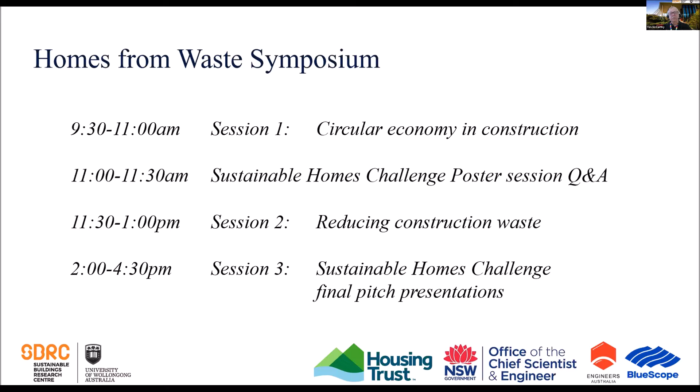We have a fantastic lineup of speakers, and I'll introduce them just before they speak. We've got Monica Richter, project director of MECLA, the Materials and Embodied Carbon Leaders Alliance; Ken McBryde, an architecture designer; Professor Usha Iyer-Raniga from RMIT; Jonas Bengtsson from Edge Environment; and Valentina Petrone from Circular Economy in the Waste Management and Resources Recovery team at WSP, one of our largest consultancy companies.

The order of events - in this online world, people are in demand by others across the globe, so we've had to reschedule things a little bit. Our first speaker today is going to be Ken McBryde.

Ken is a designer and director of Gensler, based in the Sydney studio. He's a thought leader in the construction and mixed-use industry, regularly called upon to speak at conferences, join design award juries, and contribute to research projects. His extensive local and international experience covers design of highly innovative public and cultural spaces, hospitality, retail, commercial, residential, and infrastructure - this guy does everything. In 2013, Ken founded one of my favorite organizations.

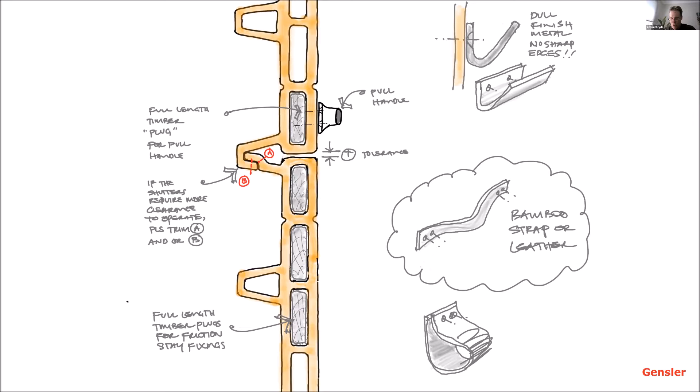Walking up the beach between surfing and working, because we'd been in an all-day, very intense working session with air conditioning and no open windows, we took a break and went to the beach. Coming up the beach, in that moment, I realized what we needed to do was come up with an extrusion that could be not only a roof, wall, louvers, but also floors, because the cost of making plastic products, a lot of it is in the extrusions themselves. So less extrusions and more cost-effective production.

So this is what we came up with about a week later after that working session, and we were very happy with that. It has generous overhangs, full height louvers. It feels like it would belong in the kampung, in the villages of Indonesia, where I'd spent a fair bit of time on surfing trips.

And it did indeed attract positive responses from the governor of Bali and Indonesian housing officials. We were onto it, there was a demand. They wanted 20,000 homes a year, Nev, and we were super excited.

However, we started to discover the fundamental problem of plastic and the specific challenges around recycling plastic waste. Have you guys ever attempted to get all the oil out of an oil bottle, or all the detergent out of a detergent bottle? You can hang and drip and they'll still be lined with residue. We started to discover that the problem with this is that it can't be recycled when it's dirty.

So to meet the structural requirements, we needed quite a lot of virgin plastic, which was not what we were setting out to do. And then we got smacked across the chops when, in March 2015, Cyclone Pam was a catastrophe that forced us to change our thinking.

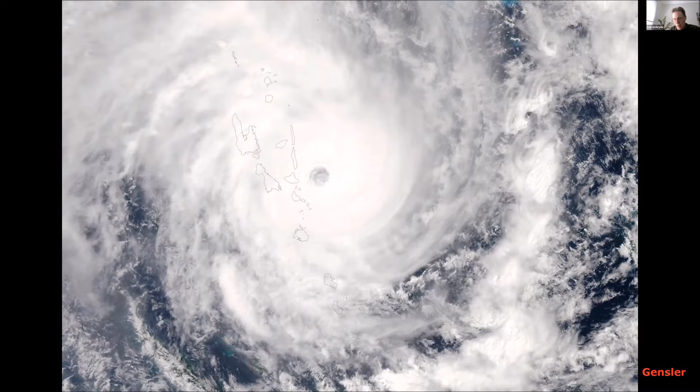And then, at another moment between work and play, I realised the answer had been looking at me. When I was a student, I came back from Europe and studied 5 years in research and development into engineered timber. Timber is the ultimate recycled material. Trees recycle carbon just to grow.

So these are some snapshots from my work, including being taught how to design with termite-resistant timber by Clem Orchard there.

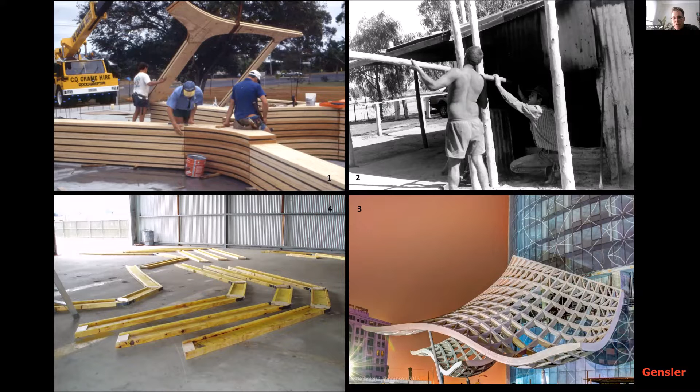And so we were very interested in a combination of timber and plastic in order to solve the problem in Vanuatu. So this is where we got to sort of Nev House version 2, and we supplied 14 nakamal.

They're essentially community buildings to the villages in an extremely remote part of Vanuatu, Tanna Island.

The design's fully modular, it's flat packed, and took about 5 days for a team of trained Australian builders and local teams of volunteers on the ground to assemble these projects. So we use recycled wood plastic composite and timber LVL, laminated veneer lumber, that is, timber portal frame structures.

Some of them were used for schools and some for a range of different purposes. This is a view inside. You can see the full height louvers, center pivot.

They're suffering from long-term deflection and some water penetration, so we've got some lessons to learn there. But essentially, they were very much designed for tropical climates.

You can see we have the end grain protected above the footings. There's a whole discussion we could have around durability in the tropics, but one of the most important things is to protect the timber. We couldn't actually use rainwater off these buildings because there's volcanic ash landing on the roof the whole time, and it also limits the success of the solar panels, which is why we have a little bit of wind there to help top up batteries.

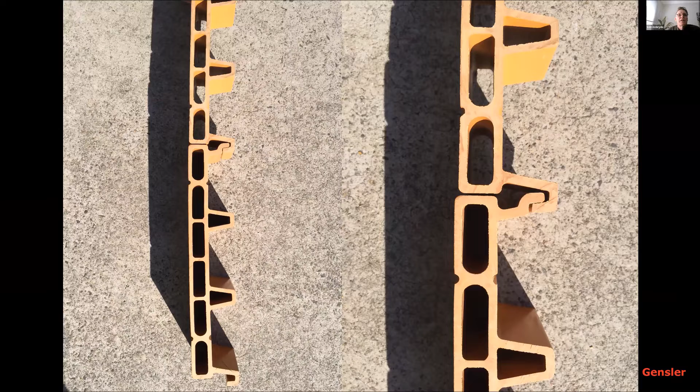The buildings were also used for nurses' quarters, and I think you saw that clinic as well. This is the extrusion that became from that original concept back in the workshop.

But as I mentioned, we're using wood plastic composite, which is a combination of mushed up timber and only 2 codes of plastic. So we were still a long way from solving the use of plastic waste.

In particular, the issue is where plastic waste is collected by communities, they only collect the ones that are readily recycled, which are the same ones we're using. The chip packets and the stuff like that are not valuable, so they don't get collected by individuals who try to get their money back from doing that work in the street.

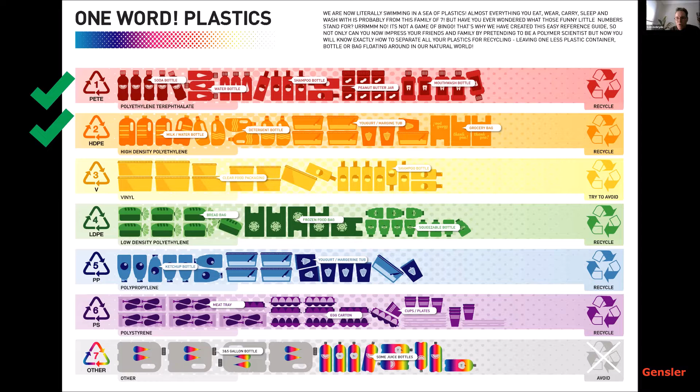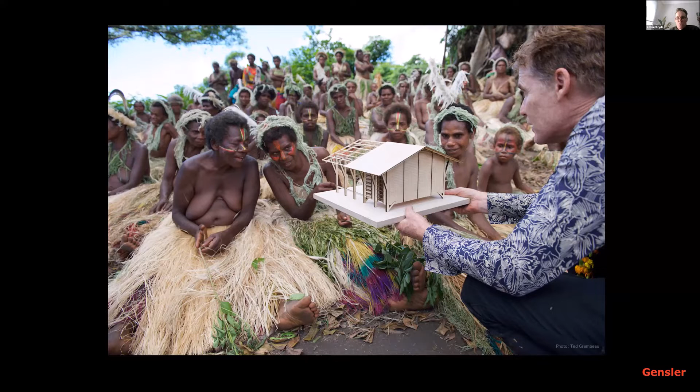The next stage was to be housing, and this is the way we were presenting. This is one of the chiefs. They could understand what we were talking about.

You can see it's inspired by a half house concept by Elemental, the architecture practice run by Alejandro Aravena — oh, his name has escaped me at the moment. The practice is called Elemental. When you don't have enough money to build a whole house, which half do you build? If you only have half the budget, our answer was the cyclonic half.

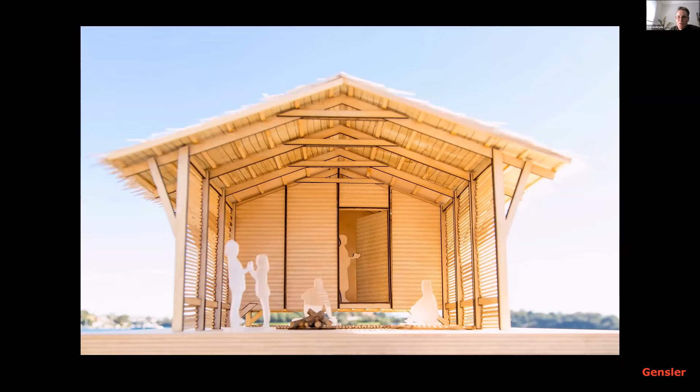So this is the next stage we're looking at, the half house, representing a cyclonic core and then an indoor-outdoor area that can be filled in by locals with woven materials.

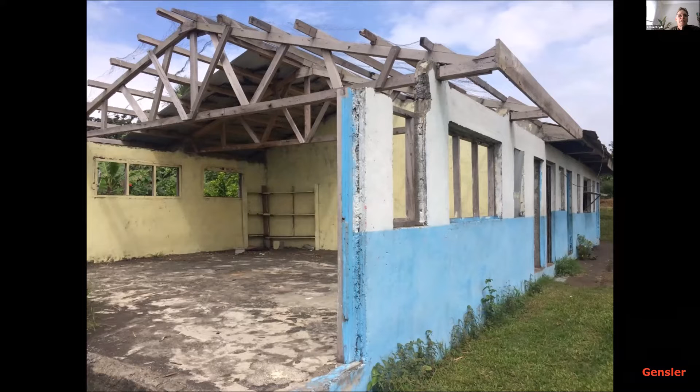When a cyclone wallops places like this, loosely assembled Western materials become very dangerous projectiles. Traditionally, people hung out around banyan trees in an area called a nakamal, and they would huddle in the nooks and crannies of these trees.

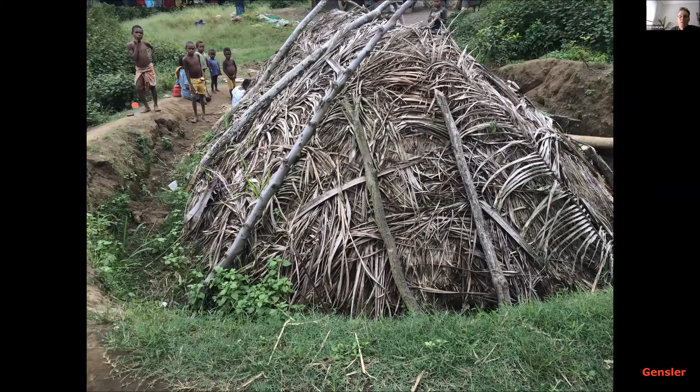This is a traditional construction, and this skill has been forgotten when it comes to housing. We can see how the earth deflects the wind over, the house is buried deep into the ground, and you can see very clear load paths here. This young guy is explaining to me how his grandfather built, and they're all taking a lot of notice now.

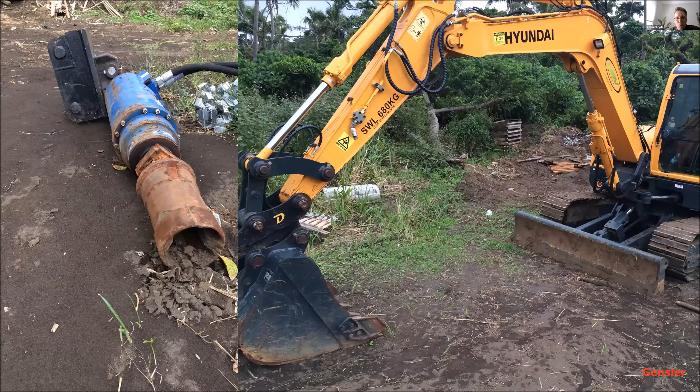But some of the issues we are dealing with: the footings don't look nice with the structure, the steel tubes, the misalignment, because we needed very heavy equipment to screw pile these in. The more suitable equipment would be something like this, or this handheld equipment.

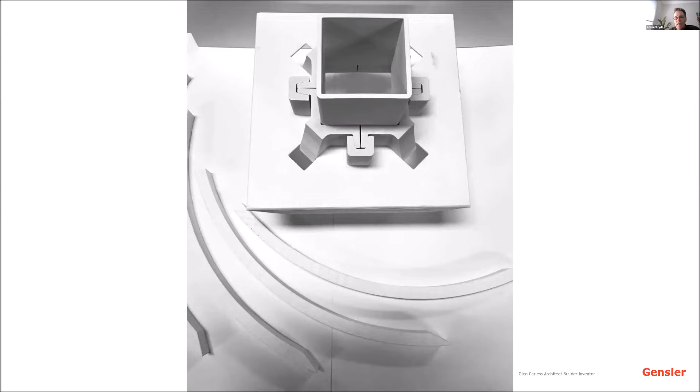I've been working in parallel with an inventor called Glen Carless to try and solve these problems. I'll whip through quickly some ideas about footings that connect more beautifully to the structure itself and that will serve more suitably for the durability challenges we have in the tropics.

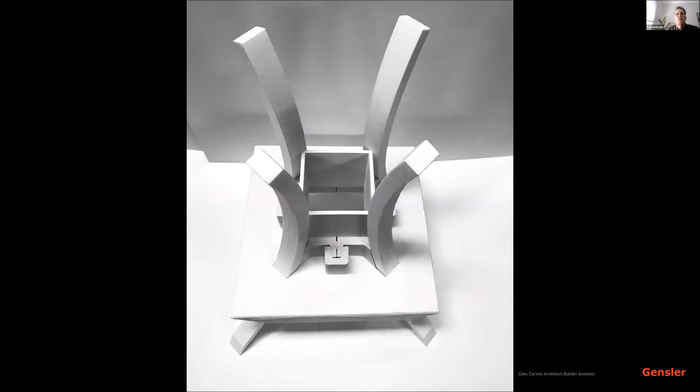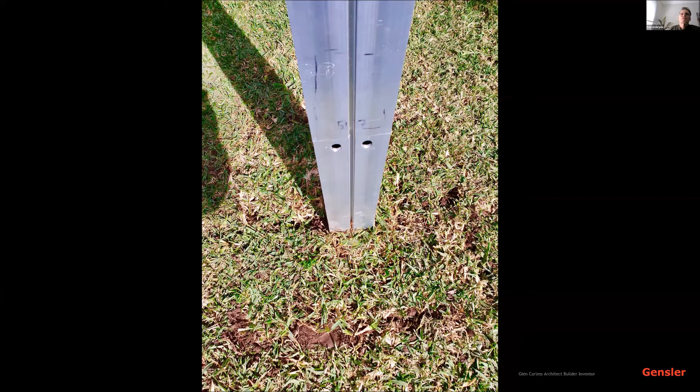The timber, when exposed and not well maintained, doesn't last well, especially if it's pine. This is recycled aluminium, which I'll talk about soon. It's rapidly prototyped with 3D printing and tested in the backyard. The footing itself is the same profile as the column, post and beam.

I'm sure you should squirm when you hear me talk about aluminium, because virgin aluminium is nasty stuff when it comes to environmental impact and embodied carbon. However, recycled aluminium is a fraction of that, and there's an abundance of it still in circulation, and it doesn't lose its structural properties when recycled.

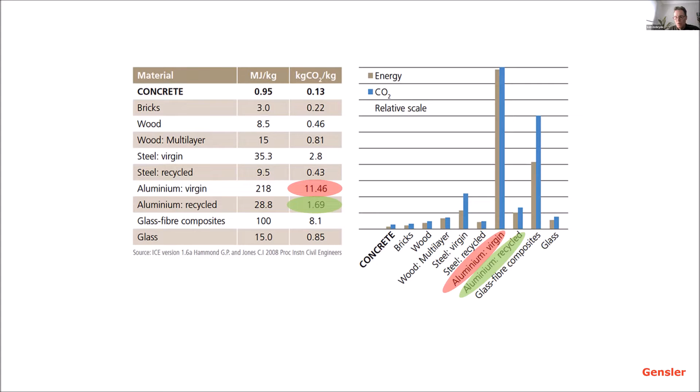So this is where we're thinking we need to augment our flat pack housing for Nev House. Concrete, of course, is to be avoided, so our footings don't have that. But check this out, look at the stair.

When you're putting housing in remote areas, we sometimes don't get any information about the sites. The chiefs choose the locations, as they should, for these buildings. And so the stair kit that turns up doesn't meet the ground.

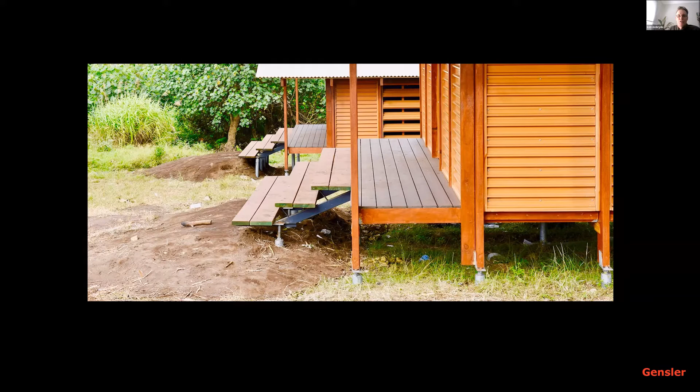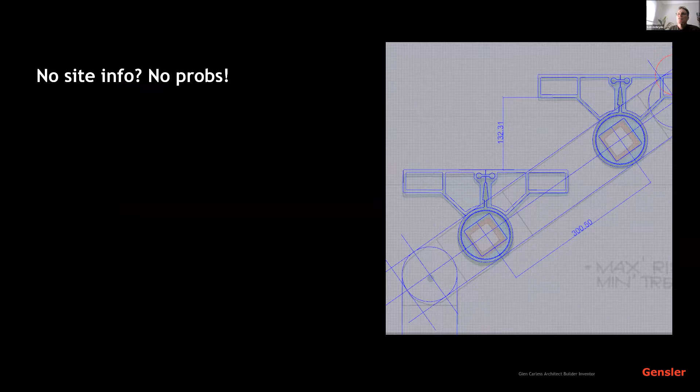So Glenn and I have been working on that problem. Imagine if you could have a kit, a stair that could change its length and indeed change its inclination so that you can solve that problem, and that you could also use the same components to make a ramp.

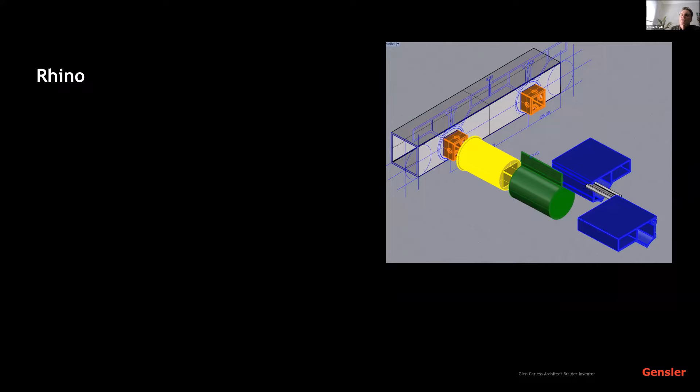So I'm getting very excited working with this inventor, Glen Carless. This is the Revit, the Rhino model he works in, 3D printing, and the real deal. This is also getting back to basics with the post and beam system of the same elements, recycled

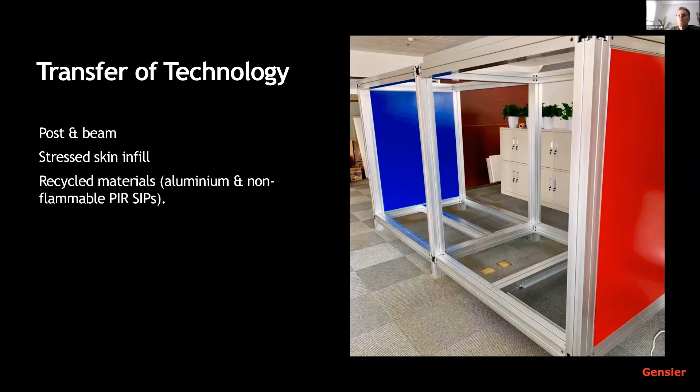aluminium, and we'll be infilling it with recycled plastic waste. It's a kit of parts that takes away all screws and fixings, so we don't need trade skills on site. That's already saving about a third of cost when you think about the cost of construction.

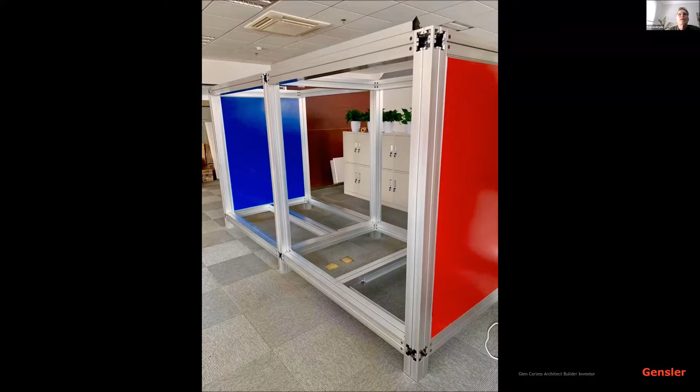This is a prototype assembled by office workers. That was interesting, they didn't have any tools, they didn't need any, and they'd never understood what this was. The kit was given to them and they put it together in their office.

The plastic that I mentioned, we're only using two codes. We're developing expertise out of Texas, where we can get any plastic, dental floss, aluminium, any waste. It gets mushed up and powder compression molded

into this sort of approximate shape of our panels that we designed, so this is molded, not extruded, and the grey stuff in there is just junk, rubbish, no structural properties. And this is where we're headed now.

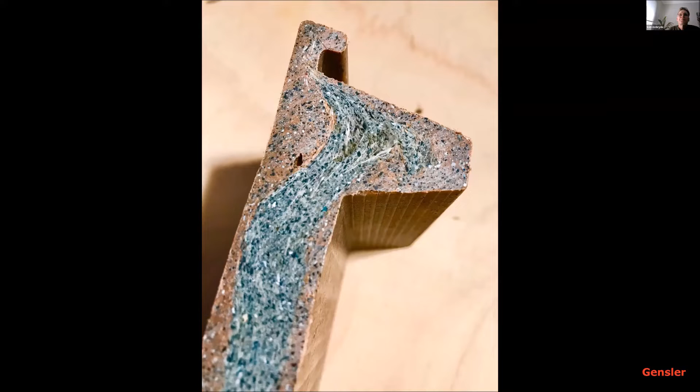I'm pretty excited about this. Meanwhile, we've won a truckload of awards with this work, Good Design Awards and Pitch at the Palace, which is the ultimate international award for startups. So it looks good on paper, but we are still a long, long way to go.

For us to develop low-cost housing for remote communities out of recycled plastic waste, I'd say realistically we're probably two-thirds of the way there, and we've been going for eight years. Thank you very much, happy to chat.

Oh, thank you very much, Ken. That is pretty inspiring. So I'll ask Leila if we've got any questions in the Q&A, and if not, I'm going to start off with one. I thought it was an amazing statistic that you began with about the mass of plastic being produced being greater than the mass of people. And there was a report this week that the mass of manufactured products is actually greater than the mass of all living things on the planet. Yeah, so I think reusing materials is obviously the way to go.

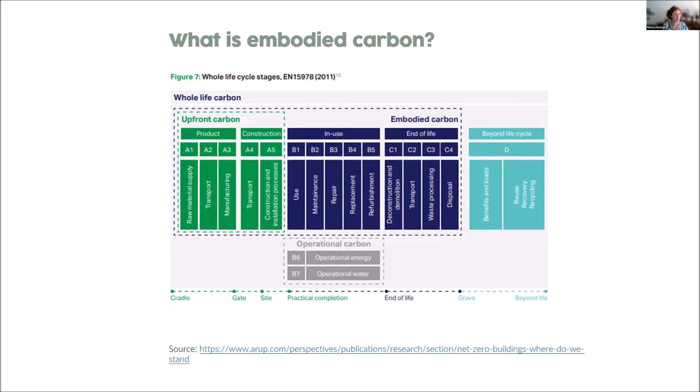What we also know about embodied carbon, from a report done recently for the Green Building Council, is that if we don't address embodied carbon, it will end up being 85% of the whole entire greenhouse emissions for the building and construction industry in 2050, which is pretty significant. We need to be addressing this issue, particularly as the energy emissions reduce.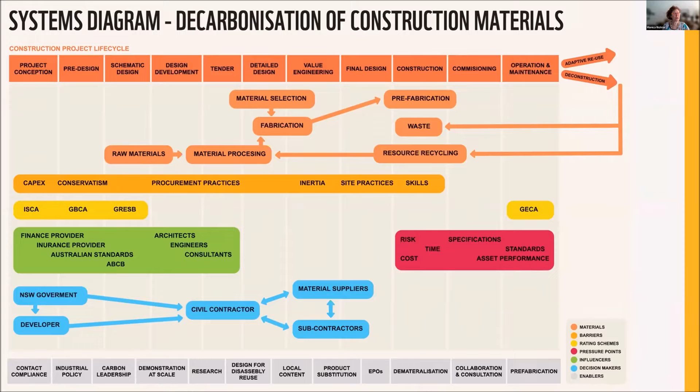Why is this important to circular economy? Because it thinks about the different parts of the supply chain construction cycle from the very beginning, the pre-design phase all the way through to deconstruction, reuse, and dematerialisation. So all the elements are important when you start to think about where those key intervention points and drivers are.

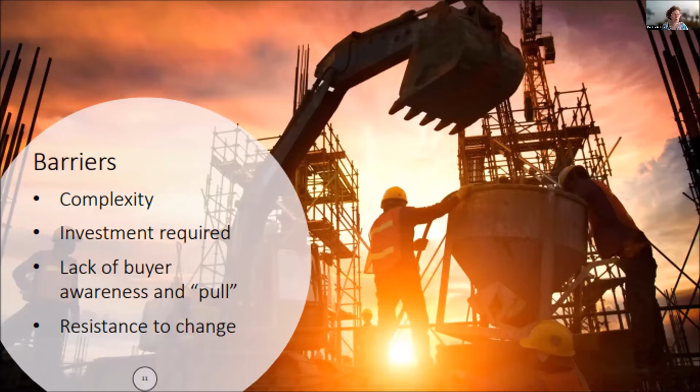We found it's very complex. We know that - you heard from Ken how complex it is to do that. Investment is required if we are going to drive the decarbonisation process, and there is a lack of awareness and a lot of resistance to change, not from a risk point of view, but from a conceptual point of view, the need to drive that.

There's also a very significant role for government to play, talking about how we value waste as a resource and how we think about the decarbonisation journey. Here in New South Wales, we're fortunate to have an activist government that's set a net zero target, driving the policy levers, with procurement standards in place, which is quite exciting. And then there's the need to work together. So those were the key conclusions of our report.

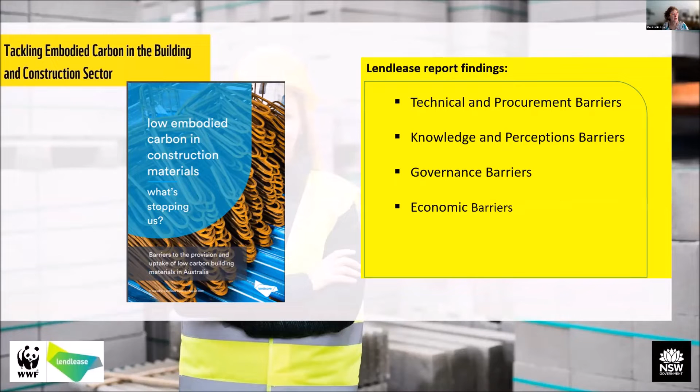Lendlease, fortuitously, were undertaking a similar kind of assessment, and they looked at a whole range of different barriers - technical and procurement barriers, knowledge, perception, governance, and economic barriers. As a result of our work, they said requesting low embodied carbon outcomes would be really good if you could request that in your procurement. But how do you go about doing that? That's when we worked with a whole bunch of organisations in the last half of last year.

In April, we launched MECLA, the Materials and Embodied Carbon Leaders Alliance. These are the organisations - now 115, 116 organisations right across the building and construction sector. It is a collaboration - we're not an industry association, we're a collaboration of organisations committed to addressing those barriers. They might be some of the organisations you get a chance to work for when you graduate. It's a real privilege, and the passion of people in these companies to really look to address this is amazing.

Aligning with circular economy principles and the Paris Agreement, we've identified the areas we're going to be addressing. Demand signals are needed. How do you evaluate the framework? What are those best practice evaluation tools, the knowledge sharing, common language? How do you support the uptake of innovative materials while acknowledging the risks around climate transition, and then supporting materials - lower carbon steel, concrete, aluminium, and some of the innovative materials.

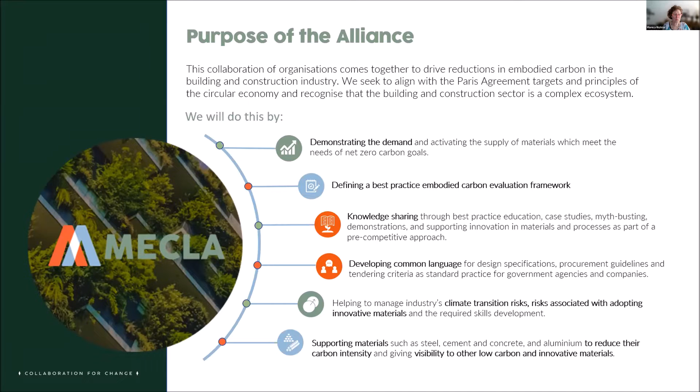So we've set up working groups to help us with this. There's about 25 people, somewhere between 15 and 25 people per working group driving this. We've got very extensive knowledge and commitment right across the supply chain to these processes. Just as a couple of examples of the kind of outcomes each of our working groups is going through - in working group 1, the demand side, let's develop a policy maker and a client toolkit. What is the toolkit going to look like? How do we then measure and disclose? How do we actually provide those incentives for that measurement and disclosure, including life cycle analysis?

That's the kind of thinking our working group is going through. Working group 2 is about to launch a discussion paper on benchmarking tools to have input, because we know there's some complexity in that area. Our knowledge base working group 3, we've got a range of case studies which will be published very soon on our website.

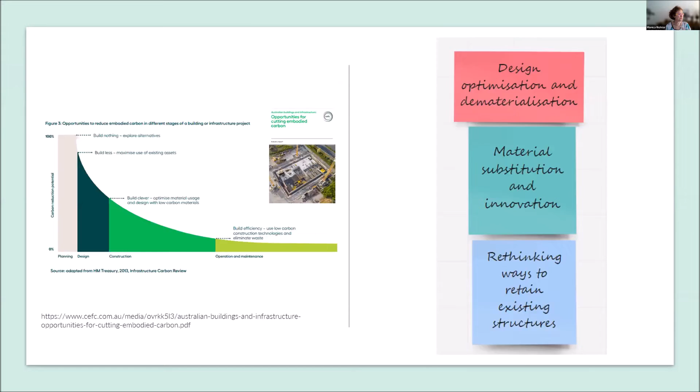I also wanted to give a shout out to Veena, who is part of our working group on other materials. Universities are a critical part of this, and the microfactory idea - she's been working with Mirvac to take old mattresses to create these microfactories where you can repurpose what is currently seen as waste. If you walk along the streets of Sydney, you see mattresses everywhere. To be able to take those mattresses and turn them into a material that can be used in the building construction industry is just the most exciting opportunity for us to recreate new materials. She's very much about the use of polymers, smart concrete and smart materials, reusing waste, creating these microfactories, and those opportunities for Australia to truly be smart. I'm sure there are many people at your university exploring those as well.

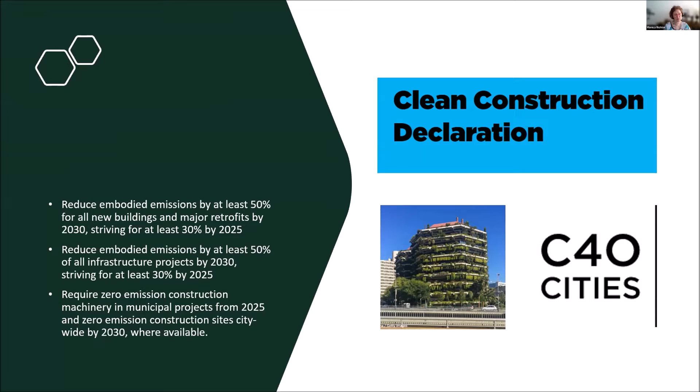It's not just happening here - we're seeing this happen right across the world. The C40 cities, some of you will be familiar with it, have a clean construction declaration with very ambitious targets - 50% of all new buildings to have reduced embodied carbon by 50%, for infrastructure projects. The cities of the world are looking for new materials and new ways of doing things. I think the world is our oyster if we can come up with some clever ideas, the kinds of ideas that Ken and others came up with.

Cool, so I'll go through this quite quickly, and thank you, Usha and Monica. That was a really great overview, and this is inevitably going to overlap a little bit with what's already been said. But I wanted to provide a little bit of a slightly different and complementary perspective.

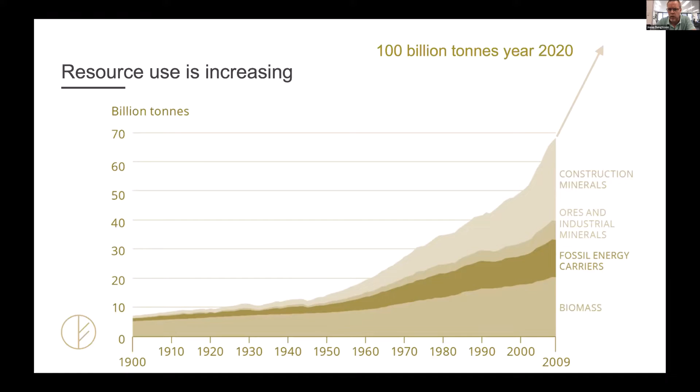If we break down this massive amount of materials that we mine and produce and put in, only about 25% are actually invested into long-lasting assets such as buildings, cars, or infrastructure. Two-thirds of it goes to waste, and we're currently on a pace of just having 10% of it recycled back to the economy. So in terms of career choices ahead of you, if you want to focus on the circular economy, I think that's a pretty safe bet that there's a lot of interest and need for change here in the next decades and even century.

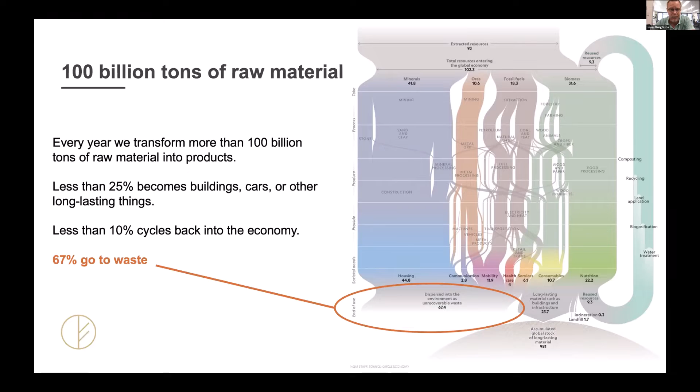So it's certainly one of the macro trends in the market, the circular economy and the economic opportunity to close the loop. Some of that is thrust upon us in terms of countries where we used to export our waste and resources to. have closed the door, and we now have to domestically deal with it much more in Australia and in the developed world. The global index that's been put out for how circular we are as a global economy is about 8.6%, which is obviously aligned with that 10% of materials being recycled.

There's work being done at the moment with the Australian Circular Economy Hub, led by Planet Ark, looking at what that number is for Australia. And without giving away too much, it's not going to be higher than 8.6% for Australia.

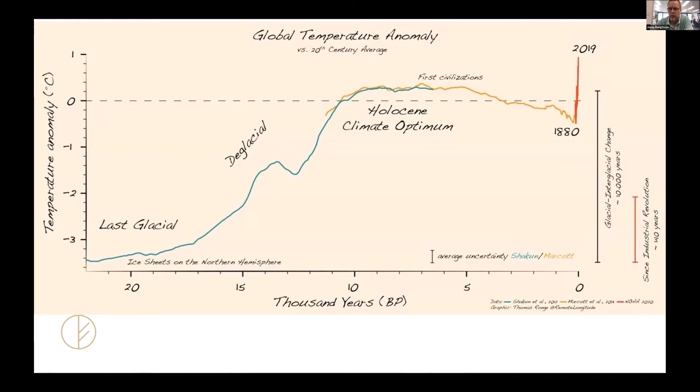At the same time, as mentioned before, we're facing this enormous challenge in terms of rapid changes in the global climate, which is 99.9% certainly man-made. So we're seeing this rapid need to change this trend from increasing emissions and temperatures to decarbonizing and adapting at the same time, which means we need to rethink a lot around how we approach the built environment, both from a mitigation and adaptation perspective.

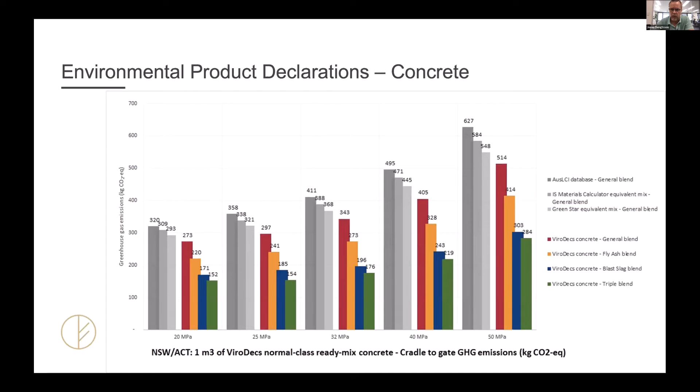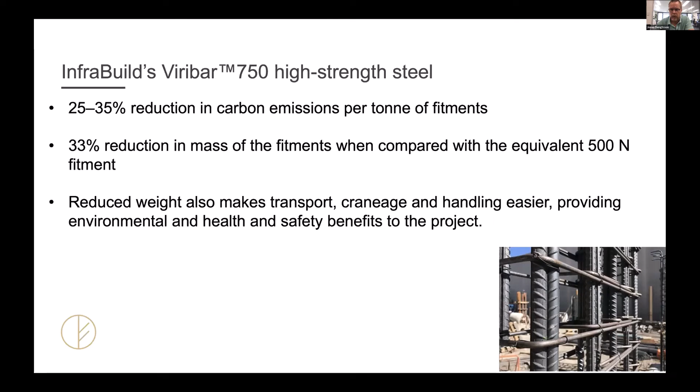We have the steel industry as well. This is from Infrabuild, an Australian steelmaker, where they're looking at what if we increase the strength in the steel we produce and invest in high performance steel. Then we can reduce the weight and reduce the need for materials in construction, thereby reducing material use as well as carbon footprint. So again, a highly commercial engineering solution that's delivering already lower embodied carbon outcomes.

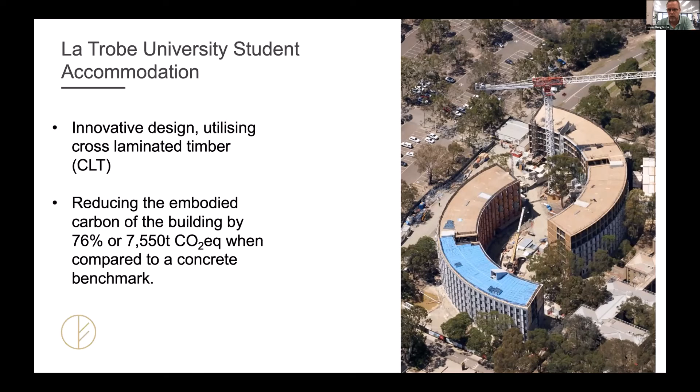And then the use of timber as well, as mentioned before, as one of those labeled the ultimate renewable, that already is starting—using more timber in construction can also drive down the carbon footprint of buildings. So all of these are signs of optimism that there's already opportunities to do things. It's not something we have to sit around and wait for, but we can be more deliberate in the design and selection of materials.

Now, I was asked a question a while back, having worked in this field for almost 15 years, that what are sustainable materials? And I was taken aback because I didn't have that one-liner ready to go about what that means, so I started to write down a little bit, well, what is it and what isn't it? Some of this has already been touched on in terms of how should we evaluate this. Because I don't think there's one material you can hold up and say, this is sustainable. It's around the context, how it's used and how we look at it.

We mentioned that it needs to contribute to the overall life cycle improvements and not be single stage, just recyclable at the end of life without taking consideration about how it's made. It needs to look at a broad range of issues. So already, just in this short introduction, circular economy, low embodied carbon and greenhouse gas emissions need to be considered, but there's much more in terms of environment, people, economics that needs to be weighed into the definition of sustainable materials. And we need to look at it on a systems level, not material by material.

It doesn't make sense to say a ton of timber, concrete, steel, how it compares. It needs to be around how this comes together in a wall system, in a roof system, in a whole building, and move away from being single focused—bamboo is better—or promoting single specific materials. We need to be material agnostic because we can't achieve development at the scale that's needed globally if we start eliminating materials. We need them all to work together.

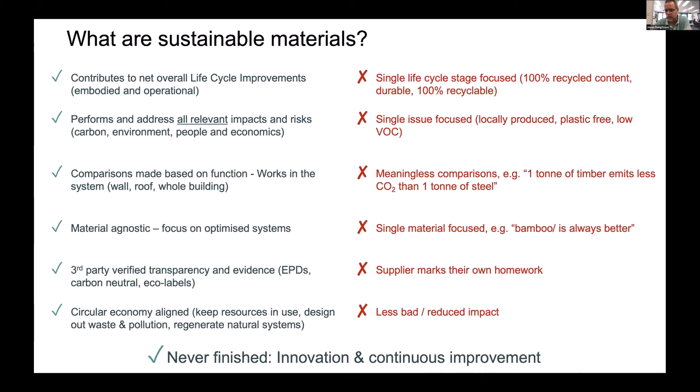So it is a mouthful to talk about sustainable materials, but I think it's great to see, with Monica and Usha and everyone talking so far, that there's a great deal of alignment on this topic.

Life cycle has been brought up, and Tim, you pointed out my background in the Life Cycle Assessment Society, which is the geeky, numbers-driven side of my personality, but I do love life cycle assessment. I think it's a great tool because it brings together the holistic scope of looking at all the life cycle stages as well as multiple issues, and provides a method and framework for actually balancing and optimizing, ensuring there's no burden shift between life cycle stages or different environmental impacts, so that we can actually balance and optimize on that basis.

And we have the products that come out from manufacturers and suppliers doing their homework, doing their life cycle analysis. They can then communicate this into an internationally standardized format called environmental product declarations, which is like a nutrition label of products, but instead of protein, fat and energy, it provides the carbon emissions, the smog, the embodied energy, the waste and water, and a number of relevant environmental impacts. So this is what we have in terms of standardized environmental information on a product level.

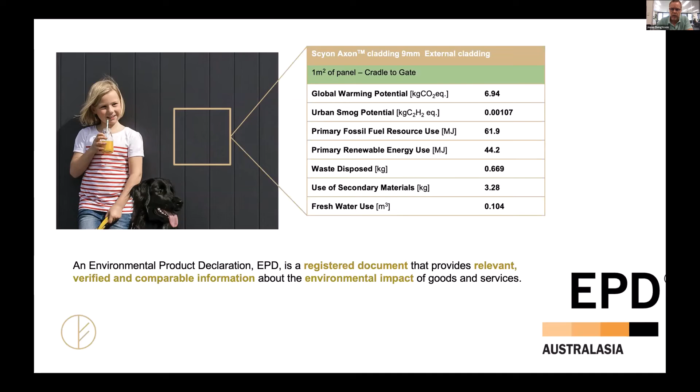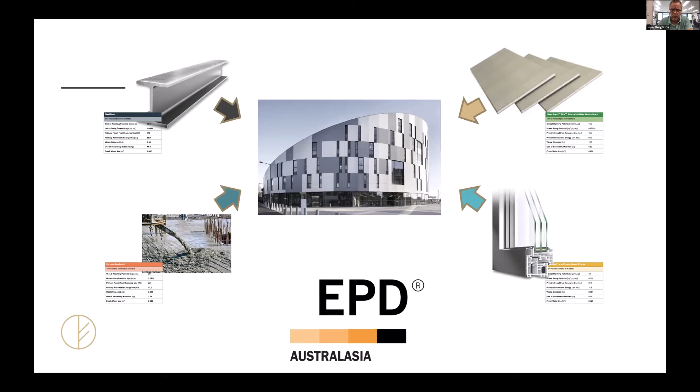Now this needs to be put together. All those EPDs need to feed into what does this mean for the overall building and asset? What's the combined carbon footprint, the combined resource use, the combined embodied water, etc. And how does that work in combination with reducing operational waste, operational energy use, operational water, and what's the end of life story of this asset, and put some numbers that are standardized and comparable to that.

So, Monica, thank you for mentioning the CEFC report. This is something we helped with the Green Building Council of Australia, Infrastructure Council, the Sustainability Council, the CEFC, and a great number of industry partners in terms of the case studies. I really recommend looking at it because it includes case studies, couples circular economy with its relevance to a low embodied carbon future, as well as economic comparisons of different material choices and design techniques. To summarize, it's a huge opportunity and challenge ahead of us.

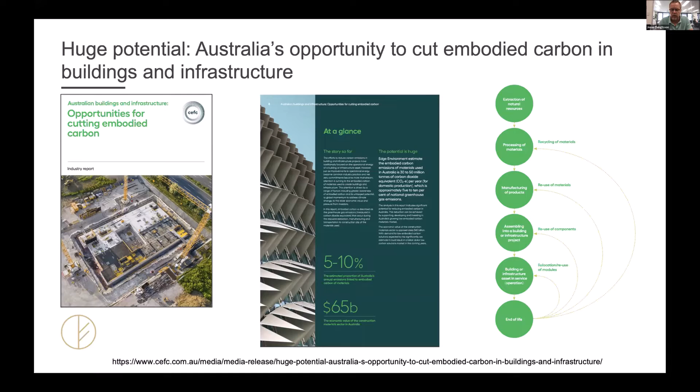Embodied carbon in Australia constitutes up to 10% of our total emissions. It's a multi-billion-dollar industry, $65 billion. If we can turn this into an economic opportunity to be a solution provider here, that means for Australian businesses and industry in this space there's a massive economic opportunity to be part of this transformation. So I'll leave it there. I hope I didn't take up too much time, but thanks for the opportunity to meet you all today.

Thank you, Jonas, for introducing so many aspects of the work that you do, and that final report, I think, is one we'll put a link to in the Q&A a little bit later. My next pleasure is to introduce Valentina Petrone from WSP. She's the circular economy lead in Australia for WSP, and has spent 15 years as an architect focused on implementing sustainable and climate resilient practices in the built environment. She's currently working with the New South Wales Department, DPIE we call them lovingly, to develop circular design guidelines for the built environment, and this has informed the circular economy strategy of the Moree Special Activation Precinct. I could say a lot more, but we're running short on time, so I'll hand straight over to Valentina.

Thank you, Tim, for the introduction, and thanks again to Lilat for inviting me. It wasn't planned, but I put together a few slides to guide my presentation, and I'll try to share my screen if that's okay. So I hope you can see it correctly. I'll just keep it easy and simple.

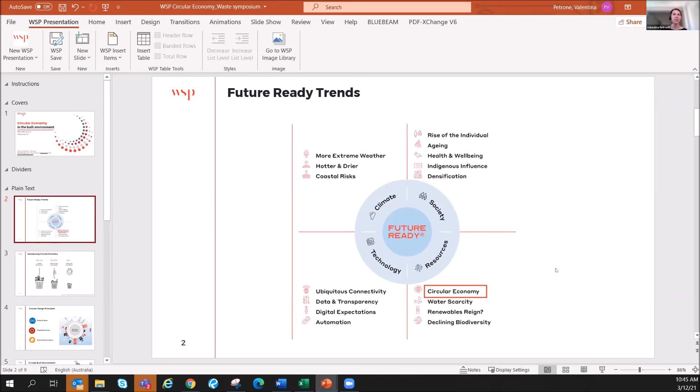As Tim mentioned, I'm WSP Australia's Circular Economy Lead, and what that means for WSP is that we are an international engineering company really looking at designing new buildings and the built environment to be future ready. We have this very interesting program called Future Ready, under different trends looking at climate, society, technology, and resources, and how we can really design together, thinking about the future. It's really exciting to see that circular economy is part of one of the key trends under resources.

As Tim mentioned, I'm an architect by background, which puts me a little bit of a black sheep amongst lots of engineers at WSP. What I try to bring as a value add to the group is my perspective from a design point of view, from an architect's point of view—looking at materials, of course, but also looking at the broader picture, so looking at circular economy from a holistic point of view.

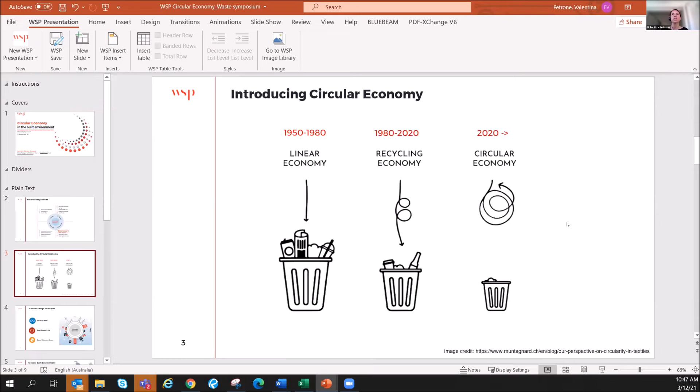At the moment, we are in a recycling economy, but due to issues linked to contamination of materials, or the nature of those materials themselves which can only be downcycled, we still have a pretty full bin. We really want to aim towards a circular economy where hopefully our bins will be really empty, because thanks to the way we design all our products and buildings, we can keep materials in use as long as possible, at the highest value.

The circular design principles are the tools we will be using in the future, and currently using, to really try to design out waste in the first place, and then minimize the use of virgin and raw materials, and keep those materials in use as much as possible. The most challenging part is the third principle: returning materials to the system.

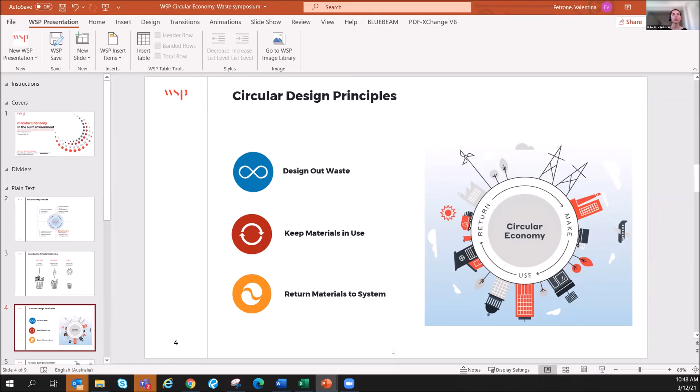If we're thinking about food waste, we compost it. It's pretty straightforward how we can return nutrients back to the environment. If we think about concrete, that's a bit more difficult, but there are good options and opportunities coming up.

We used to extract raw material, manufacture it, and produce the materials we needed. We just applied conventional design approaches, constructed our assets, used them, and once the timeline of a building finished, we just demolished it. At the moment, we really need to rethink this approach, and the key part is the design component.

So to all the young designers and future professionals in this virtual room, I really encourage you to be curious. There are lots of materials available, particularly coming from Europe, amazing case studies that I strongly encourage you to keep researching, because it's an emerging market and it's great to see the shift happening.

We really need future professionals to understand the power of a circular economy, and this shift to having hypothetically buildings that can be fully disassembled, deconstructed, and the materials reused as is, or with a minor remanufacturing process, in new buildings.

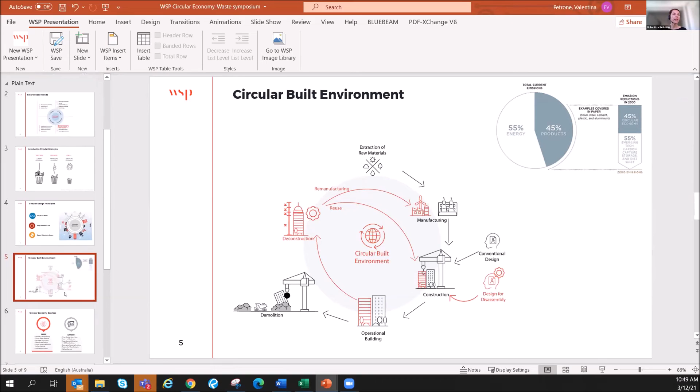In terms of sharing what's been my experience this year, it's been absolutely crazy, which is good. As Tim mentioned, I started from scratch defining the circular design guidelines for the built environment, which will be released officially next year, which is very exciting.

I've started working at every scale of project. For master planning and precincts, I've worked on the Moree special activation precinct, and I'm currently working on the Arden precinct in the City of Melbourne. I'm also working internationally with Canada, defining construction and demolition waste minimization strategies.

We're defining and providing advice to design teams, because architects are really interested in this topic, and developers as well.

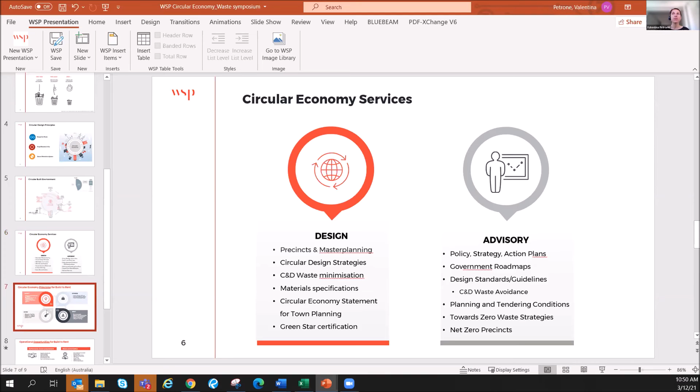One type of project I'd like to share some experience with, which links well to the topic of this symposium, is build to rent, and on a linked side, student accommodation and social housing, where we see a lot of interest from build-to-rent developers, because finally when the developer is also the building owner and manager, they can see and understand the power and possibilities for implementing circular economy principles.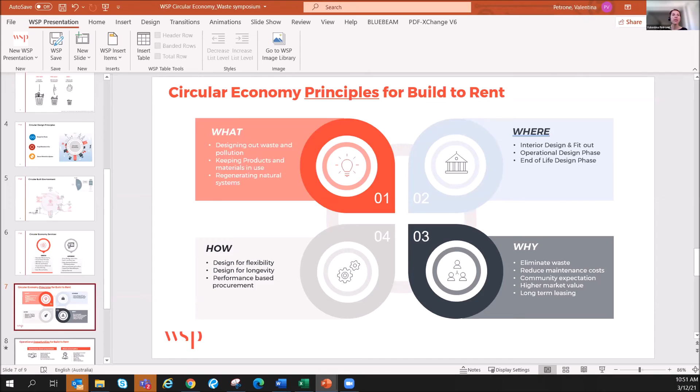So buildings designed for flexibility and longevity, where we don't own all the components anymore, but start to implement performance-based procurement and leasing agreements, really impacts the ongoing maintenance and cost for builders. We see developer benefits, including reduced ongoing management costs, but also renter and user benefits.

I really love the connection between circular economy design and sharing spaces, the sharing economy, and opportunities to promote a sense of community. I think COVID has taught everybody how difficult it is to be isolated and not connected with our neighbors and colleagues.

Opportunities like tool libraries and repair cafes are all opportunities to not only reduce the amount of materials and products we purchase and throw away every year, but also opportunities for upskilling and meeting like-minded people.

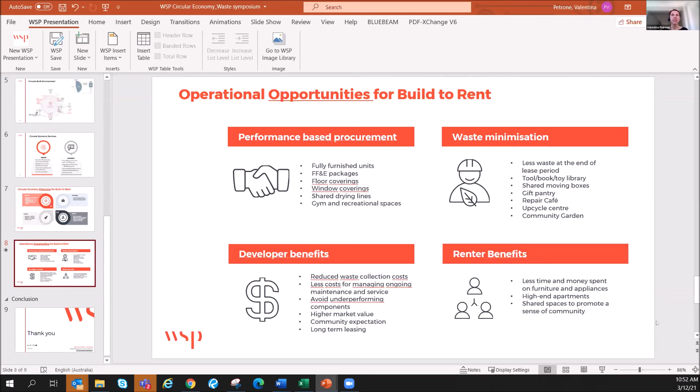Thank you, that's my few minutes of introduction, and I'm looking forward to some questions.

Fantastic, I might jump in then, Tim. It seems we're short on time with only about 10 minutes to ask questions, but all of those presentations were absolutely amazing and very thought-provoking from so many different perspectives.